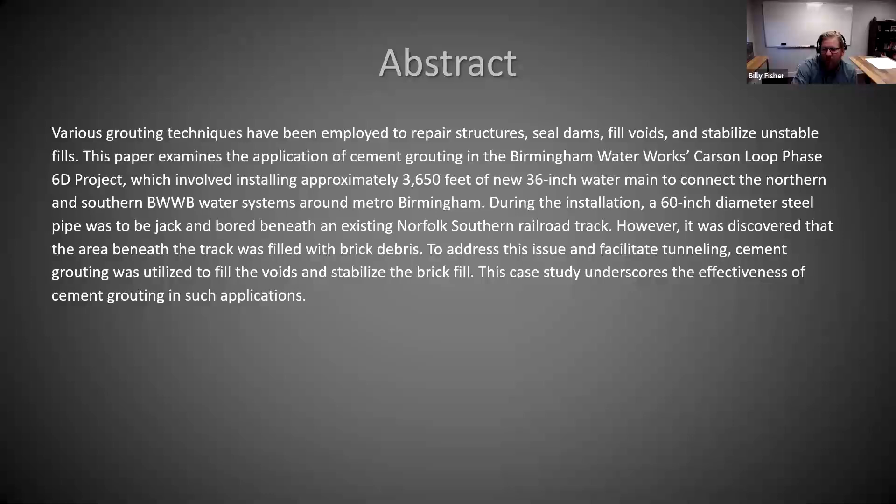This is to be just a case study on a grouting project for a tunnel. The project involved a new 36-inch water main that was going to connect the north and south water systems around Metro Birmingham, and a portion of that was going to be a 60-inch steel encased tunnel that was going to go beneath an existing railroad track. We're just going to go over the history, some of the plans, the geology, kind of what we encountered, and then the grouting program that we had to develop and then go and execute.

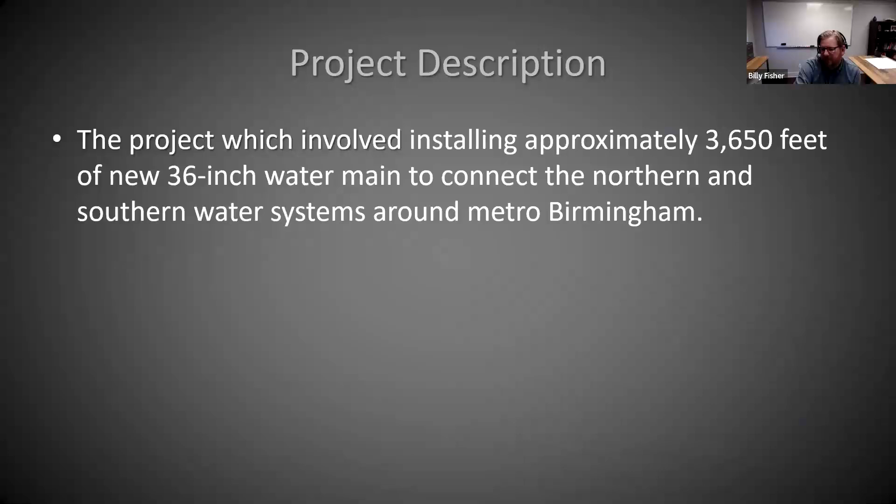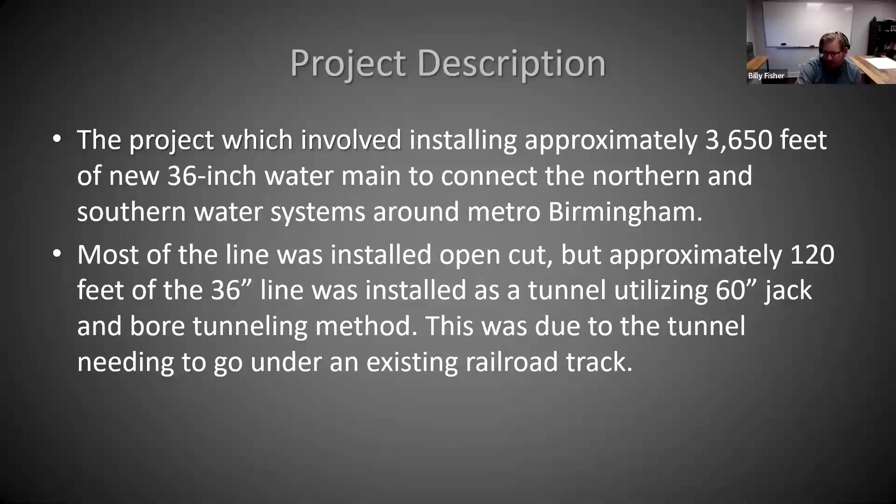The overall project was 3,650 feet of water main. 120 feet of that was going to be 60-inch steel cased, using a jack and bore tunneling method originally.

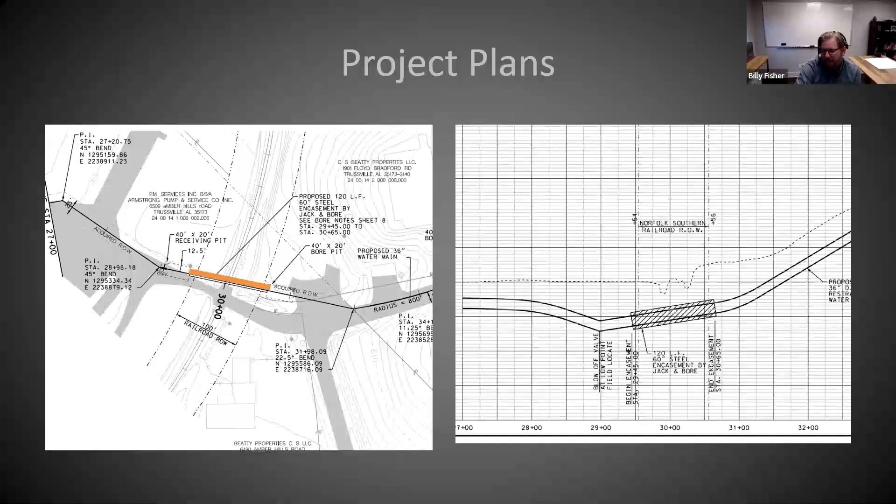This is the 120-foot section that was going to go under the existing rail line. In that zone, approximately 3 borings were done, and you can see the tunneling is relatively shallow, approximately 13 feet below the rail line. That's how much overburden there was over the proposed tunnel.

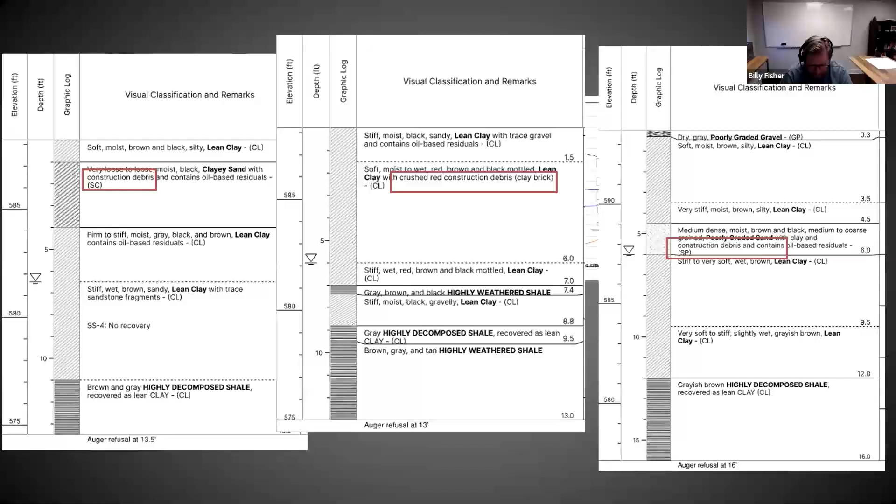You'll notice there was some construction debris in the borings, but mainly it was just in the upper 5 feet, so the tunneling people weren't too concerned about that based on the borings. It wasn't until later that we ran into the excessive amount of brick that was in the tunnel.

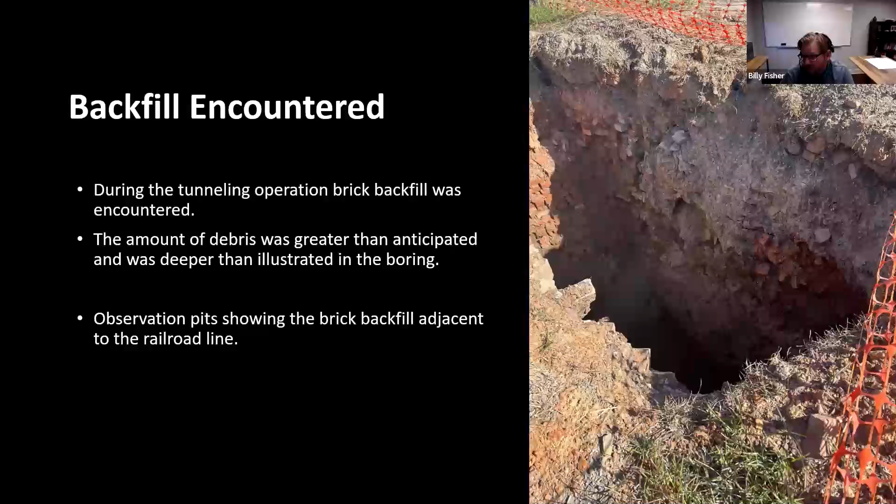The casing was going to be hydraulically pushed, and then the face was internally auger mined. There was a lot more brick than anticipated based on what was provided in the borings. There was a concern that as the face became unstable during the jack and bore, it could cause issues with the existing rail line.

So tunneling was paused, and we did some exploratory pits to find the extent of the debris. Based on the observation pits, you can see the stacked brick. It was a very uncontrolled fill under the railway, but all within the railway right of way, which is where the 120-foot section of tunneling was going to take place.

Only about 60 feet of that was affected by the backfill. So it was determined on site that we'd have to stop the tunneling, come up with some options to figure out a way to get through this.

Two options were evaluated. One was just to lower the tunnel alignment to pass under the fill through the lower rock formation. That would have involved creating a deeper access shaft, so we'd have to put more shoring in, lower that, bring the tunnel down deeper and then bring it back up, along with the cost associated with the additional piping.

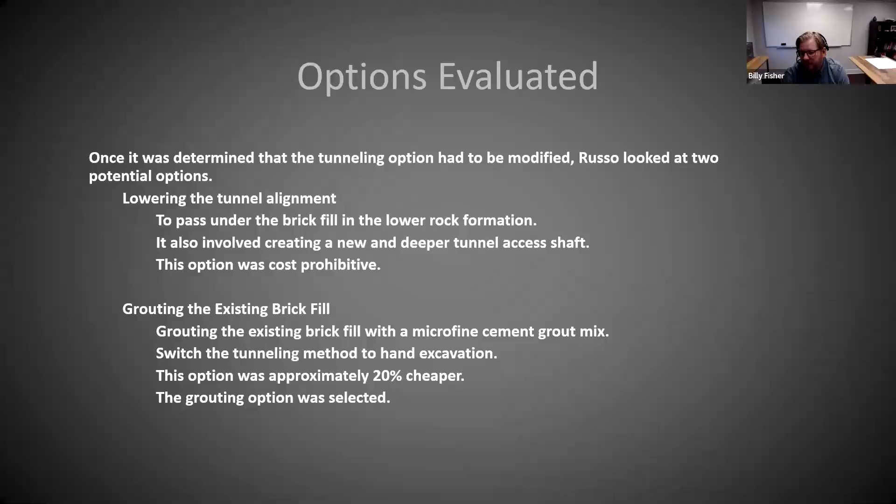The other option was grouting the brick and soil matrix. That would lock all that material together, and then they could continue the tunneling operation.

So to do that, we had to create a grouting program. Once we had selected grouting, we had to determine the best option and what type of grout to use - whether a cementitious grout, a polyurethane grout, a compaction grout, or a low mobility grout.

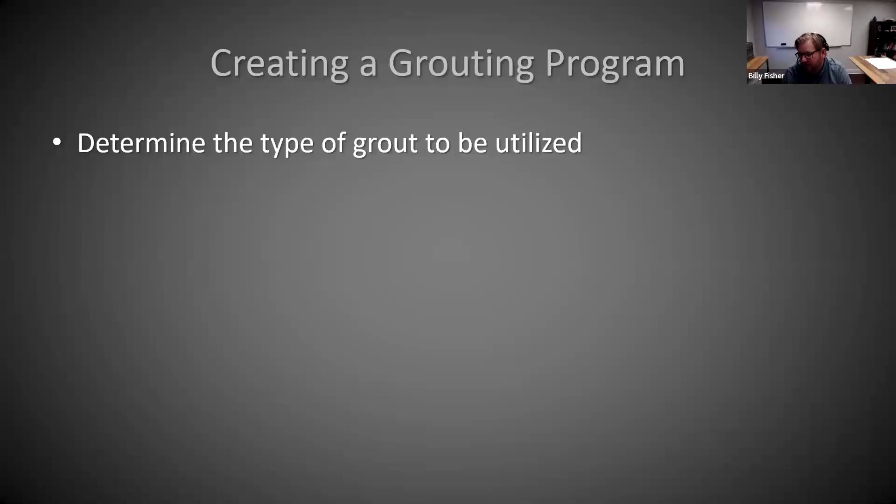Based on the potential for large voids and the need to tunnel back through the grouting material, we opted for a cementitious grout. Then we had to develop a mix design appropriate to lock the matrix of soil, but also weak enough so the tunneling contractor could tunnel back through that material, because we were going to be grouting the entire profile of the tunnel as well as all of the soil above the tunnel.

They were just going to use conventional tunneling methods - they weren't using a boring machine or anything like that. They were just jack and boring originally.

How we were going to introduce the grout into this soil matrix was one of the things we had to determine, and I'll go over what we ultimately decided to do, along with what the grouting criteria would be in the field to ensure the zone had been properly grouted. Ultimately the main goal was to get this zone grouted so we could tunnel back through. We didn't really have the option of this not working, because we had proposed both options and we selected this one.

And we had to be able to make adjustments in the field, like with any grouting program. You can sit around and determine the best option, but it has to be flexible enough that when you get into the field, you're going to have to make changes typically.

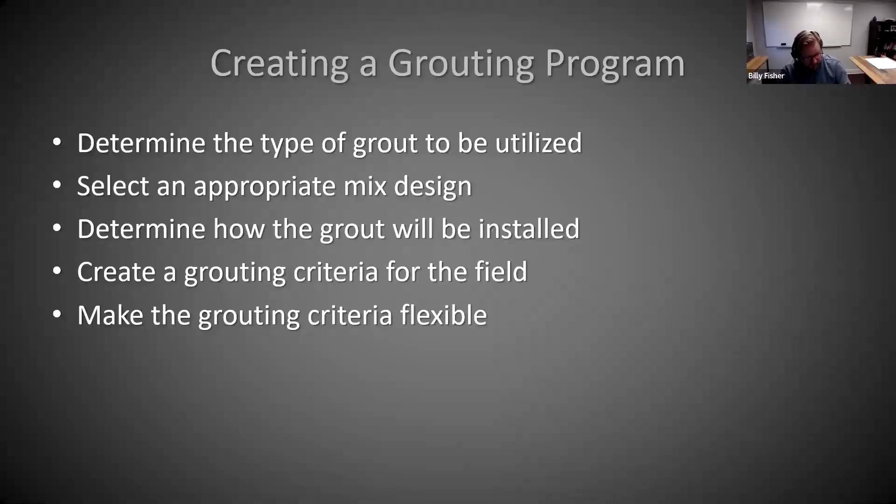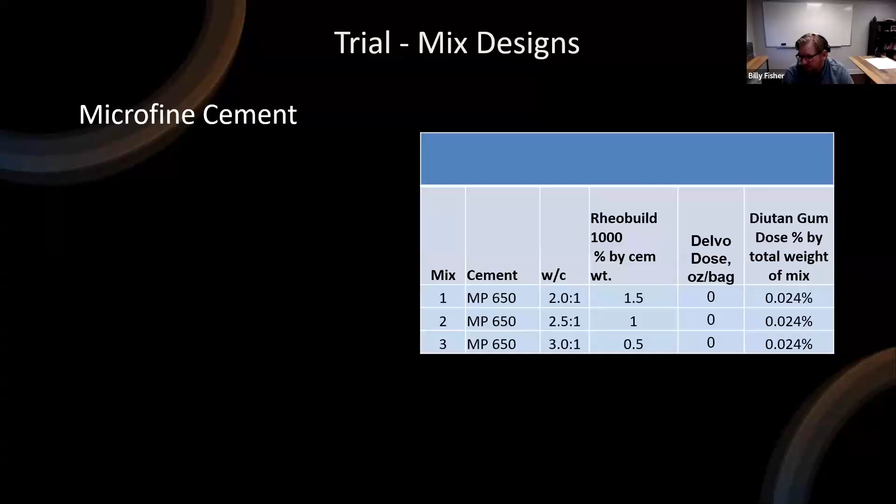We opted for a microfine cement. We ran a few different mixes in the lab just to determine what would be the best option for us. We ran a 2-to-1 water cement ratio, a 2.5-to-1 water cement ratio, and a 3-to-1 water cement ratio. We were looking at ultimately how much the mix was going to bleed, what was the bleed percentage, and what was the strength.

We had opted for, we were targeting like 200 psi for the grout. We figured we just needed to be strong enough to lock all the material together, but also be weak enough where we could tunnel back through this. And then we wanted to limit the bleed to less than 2%.

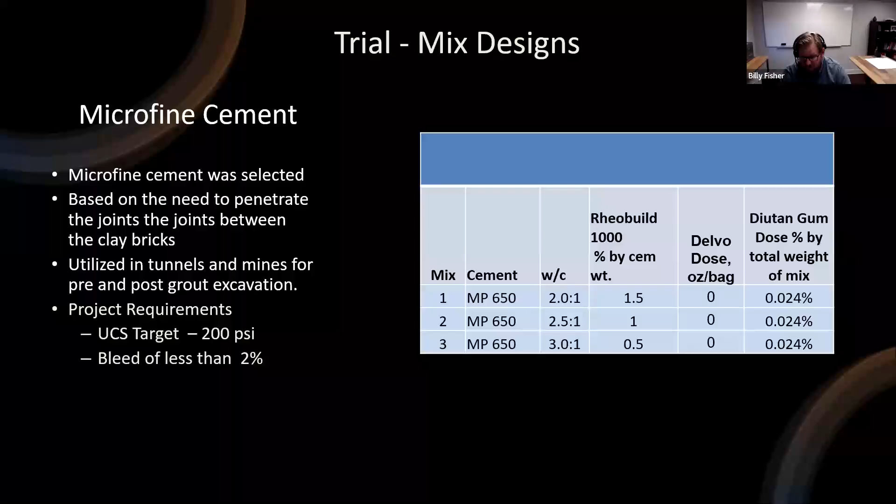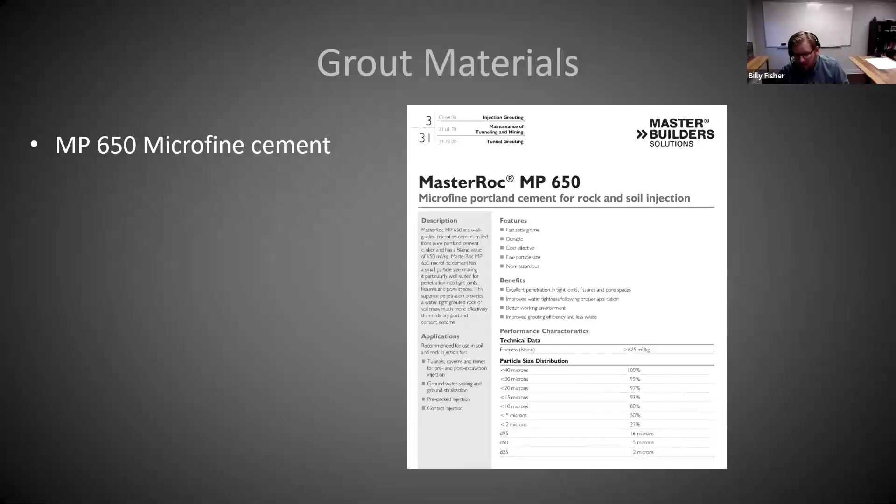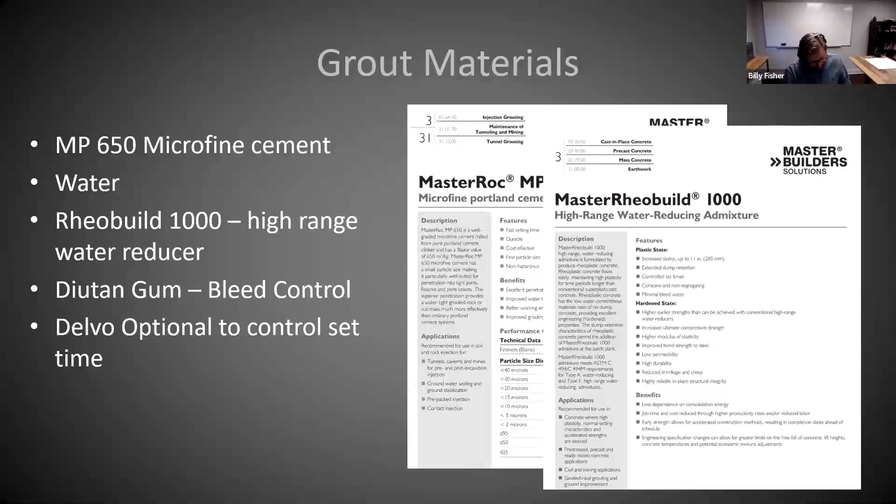So we used a Master Builders, MasterRoc MP 650 microfine cement. Obviously had water in the mix, and then we used a high range water reducer, as well as Diutan gum. And then we also had Delvo just to control the set.

So the Diutan gum was what we used to control the bleed. In many of your applications that are under pressure, you don't want separation. We're trying to keep the water from separating from the mix because we're pumping into a mass. This is especially important here because we weren't sure what type of voids we would encounter, if they were larger voids. So we needed the bleed to be stable for the grout, so it would uniformly suspend until the grout was able to set, and everything would be uniformly distributed into the void space.

Grout stability can be described in two ways through bleed, and then Diutan gum was a sugar byproduct, which means we had to be careful we didn't overdose it as well because it can adjust the set time. The Diutan gum was a powder, so we had to mix it with water to make it into a gel prior to adding it to the mix.

Some of the results from the mix design: mix one in the lab, we had confines of about 260 psi and roughly zero bleed. Mix two had similar breaks, but we had a greater amount of bleed. And mix three, we determined it was not really going to be an option because the bleed was greater than 3%, and also they had difficulty removing the samples from the molds. It just was not setting - too high of a water cement ratio.

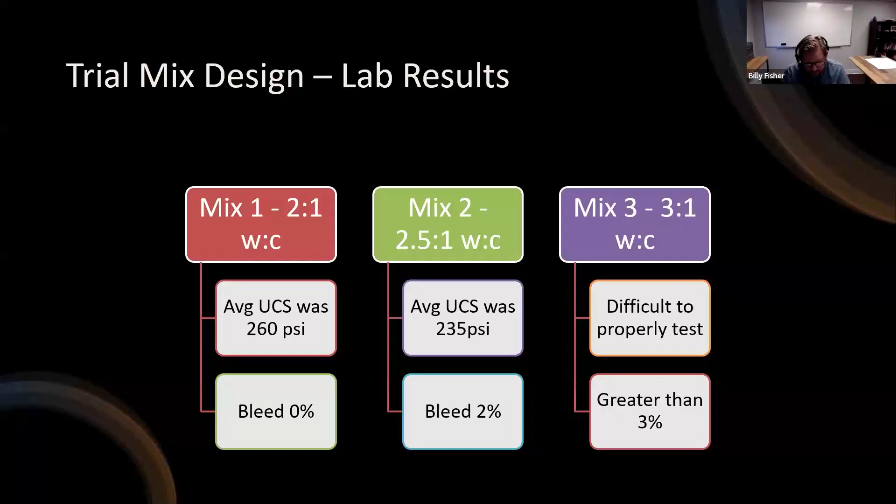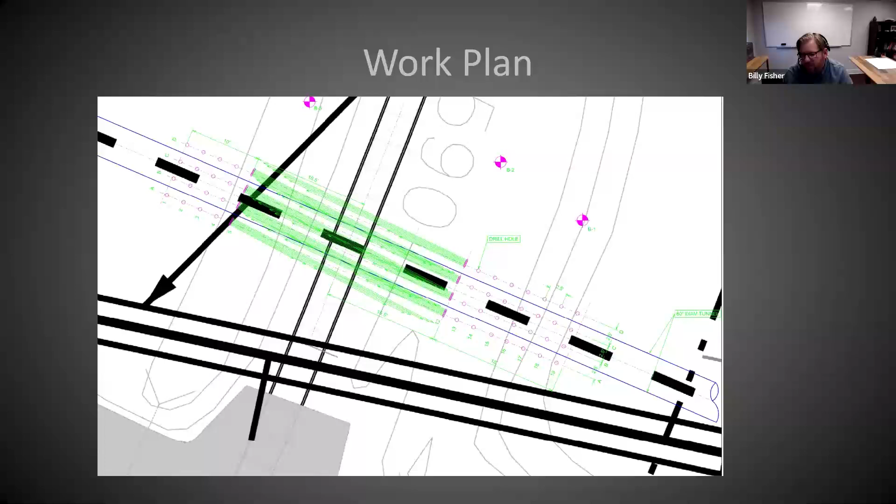So we had to develop a work plan. We decided we would go with 4 rows of grout holes on like a 2.5 by 2.5 grid. And because of the track, we were limited to how close we could get to the track based on the right of way, since this was an active rail line. So as you can see, we had vertical holes and battered holes to get to the zone below the track, based on the project constraints that the railroad placed on us.

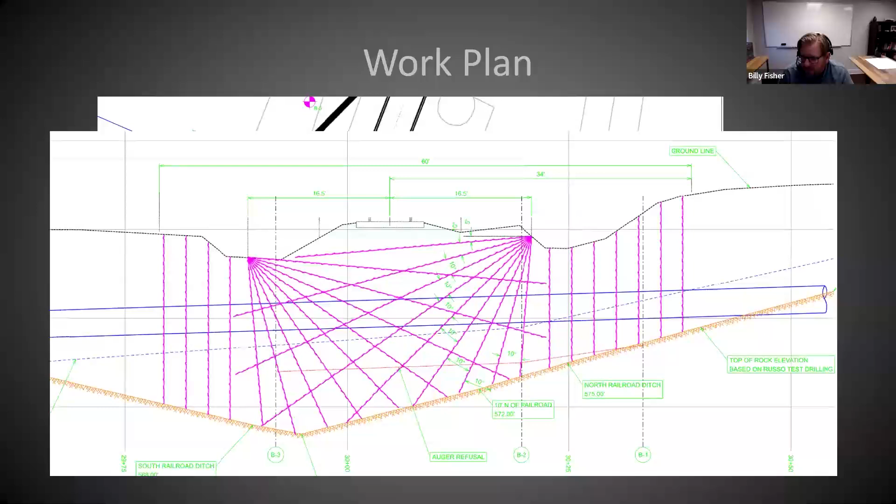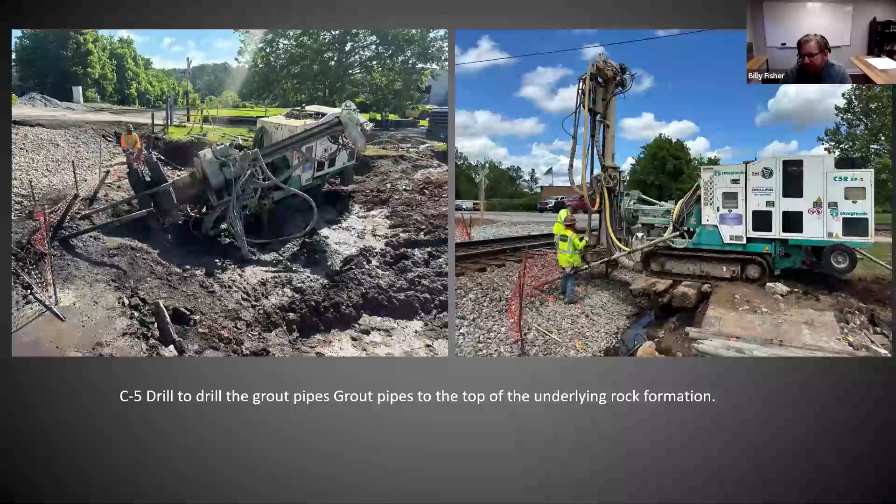This is just kind of - we used a medium-sized drill, a C5, to drill in the grout pipes. We drilled the holes down to the top of rock, so we were pretty much grouting from the rock formation all the way as close to the surface as we could.

Here's the pipe, and you can see the different batters on the pipe in the field. So it was obviously made, grouting a little bit complicated, but that was just due to the railroad requirements.

So we used a Chem Grout machine to batch. Typical batch was, we used the microfine cement, they were 33-pound bags.

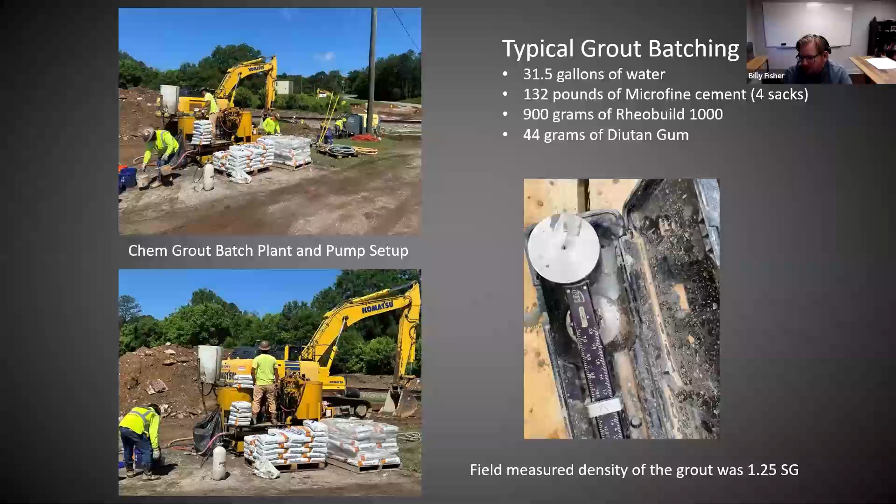We were batching 4 bags at a time, 31.5 gallons to 132 pounds of microfine cement. Then we were adding 900 grams of Rheobuild 1000 and 44 grams of Diutan gum to control the bleed. That was pre-blended with water to create a gel material. In the field, we were getting a specific gravity of 1.25, which was very similar to the lab results we were getting on the mixture.

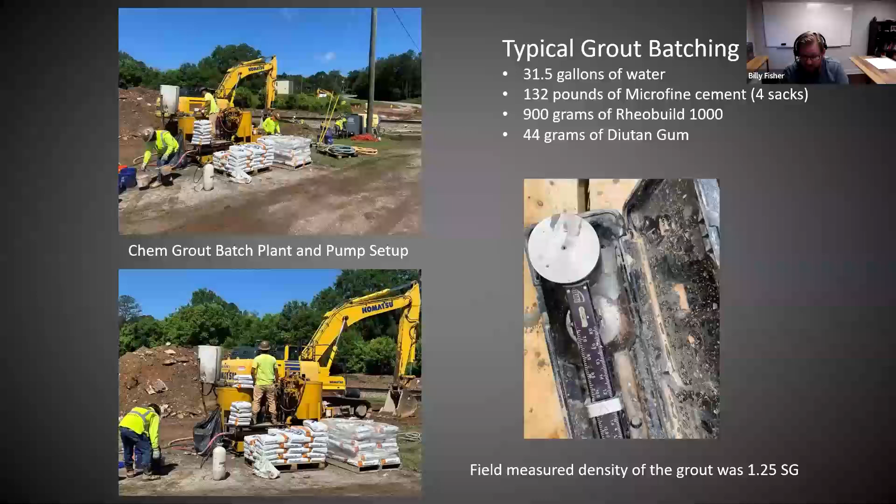So we set up a primary and secondary sequence across the holes. We started with the outer two, line A and D, and we grouted those in a primary and secondary fashion just to create some confinement. Then we would come in and do the interior rows B and C, on every other pattern as well.

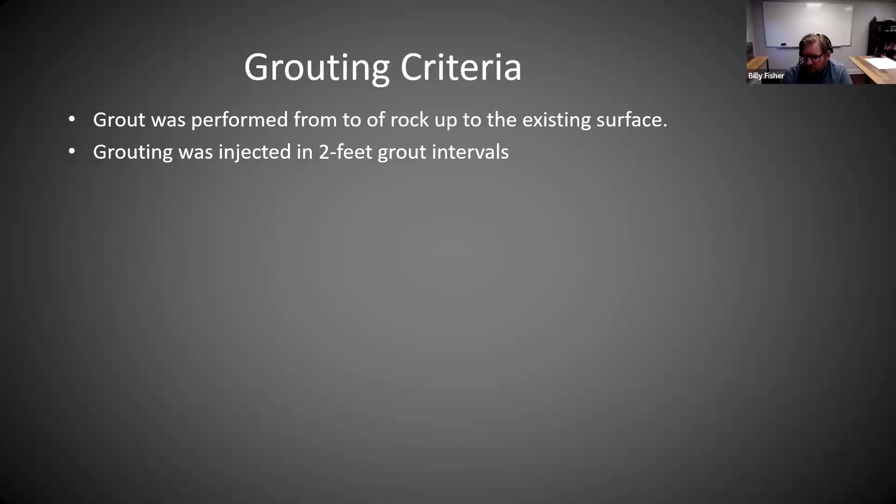So the grouting criteria, how did we determine that we had grouted everything properly? We were going to grout from the rock to the surface. We did grouting in 2-foot intervals. We would grout, and once we hit our cutoff criteria, we would come up 2 feet, and so on. We determined that we would do it based on, we were shooting for 100 psi.

It's a flow of about 0.5 cubic feet per minute for 10 minutes. Or if we had refusal, a grout refusal, or communication with another location was another one of the criteria to stop grouting. Or if we hit an ultimate pressure of 200 psi.

But if we didn't meet the criteria, we really had no volume limit, because we were trying to make sure we filled all the holes as long as we didn't have refusal. And then once we got the refusal, we would go to the next stage, and so on.

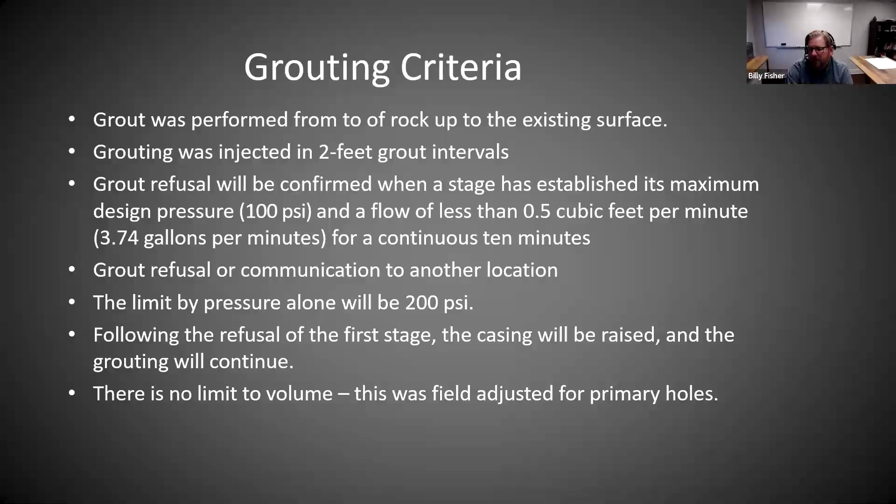Once we were going, we decided on the initial primaries, we made a change in the field. We set a volume cutoff just on the outside primaries of 75 gallons per zone, so that we could try to limit how far the grout was traveling outside of the zone we were trying to grout. So we did set volume criteria on just the outer rows, and then we didn't on the inner rows ultimately. That's when I was talking about we have to be able to have a flexible grouting program.

We did field testing on just the grout to make sure, because obviously we were concerned with strength. We want to make sure in the field we weren't creating a stronger grout or a weaker grout, because down the road it would potentially be an issue for the guys doing the tunneling.

So our 14-day average was 255 psi, and then our 28-day was actually slightly less. Not really sure what led to that ultimately, other than they were very low strength samples, and I don't know if that had more to do with the curing of the grout or maybe the handling of the grout. But I know that some of the samples were damaged because it was difficult to get the sample out of the mold. We actually had to go to the testing lab just to help them with that.

We talked to Master Builders just to see what they recommended. So we had come up with a plan on how to get the samples out without damaging as few of those as possible.

Ultimately, this process was just to facilitate the tunnel installation. There wasn't a contract-specified design strength. So ultimately, the fact that it was less at 28 days, it was really just there to get the tunnel in, and that was the ultimate goal.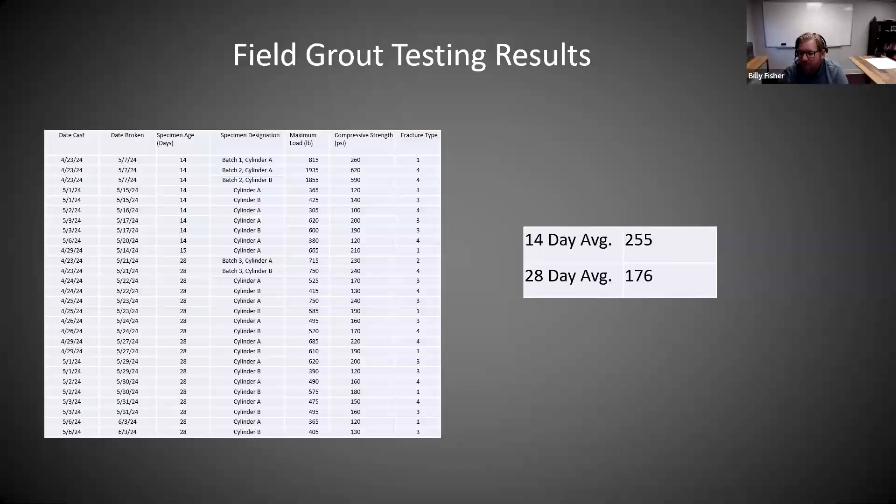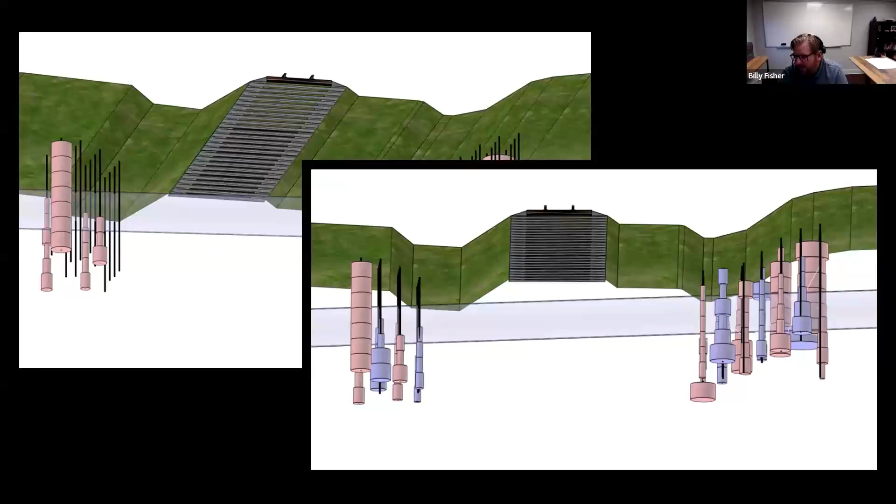This is just some modeling that we did, kind of as the project was going, just to see where the grout was going. Obviously this isn't an exact representation of what we did in the field because we really don't know, but these are just representing volumes at depth to get an idea of how everything was going, and where we needed to install tertiary holes, which we did install a few where we had very low grout takes.

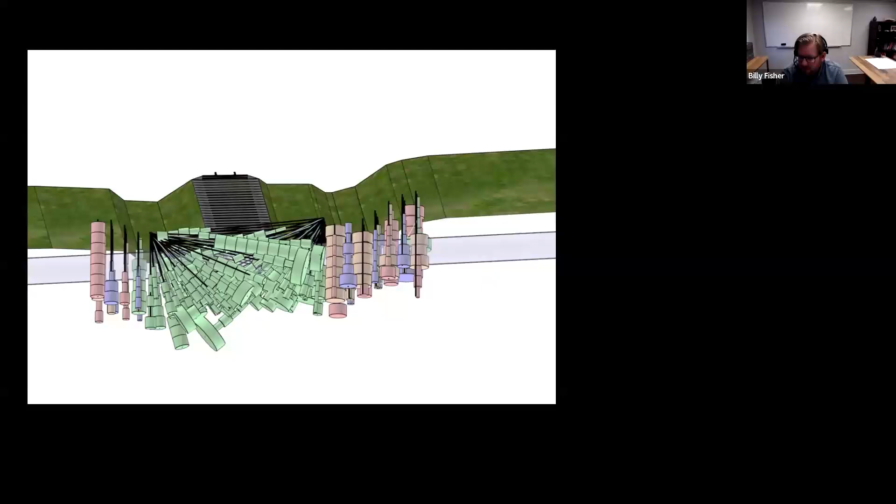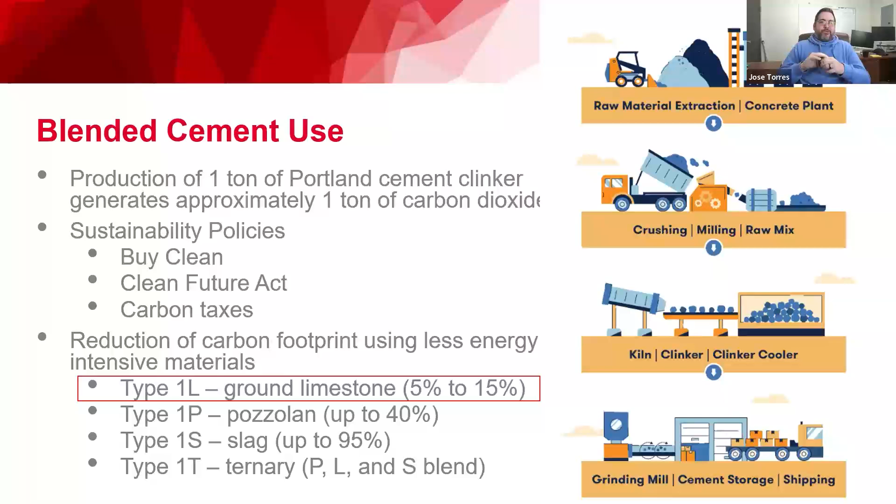So I already talked about this—ASTM C595, Type 1L is 5 to 15% ground limestone. They recommend that you use it basically in a 1-to-1 replacement. So if you're using Type 1, Type 2, Type 3, or even Type 5, they make it real simple: just put the same amount of Type 1, 2, 3, 5 that you were using in your mixes and replace it with 1L, and then see what happens, using a like-for-like manner.

One thing I've noticed, and the reason we're having this discussion, is we get a lot of bids or proposals out, and everybody's copying these specs, saying use Type 1, use Type 2, use Type 3, use Type 5. But these things are getting harder and harder to find as companies move away from making them. Nobody wants to be the first person to use Type 1L, but somebody has to be. I'm not saying we are the first people, but certainly there needs to be more discussion and testing around 1L.

And yet I also have to say this: stop copying specifications, please. All right, I had to do it. I know Conrad's next to me; he's going to hit me, but I have to say it—stop copying specifications.

So we're going to look at 4 different jobs. The first one was Boone Dam.

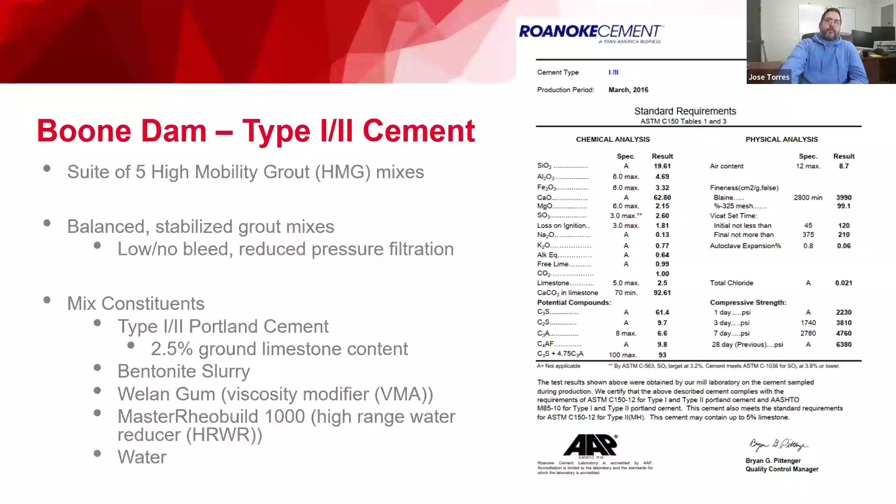The other job we're looking at is Chimney Hollow. There were about 4 balanced stabilized grout mixes using type 3 Portland cement. I had a limestone content of 3.7%. The mix was very similar here. The only difference is we switched out welan gum for diutan gum, just for availability purposes, and diutan gum is a little bit more robust.

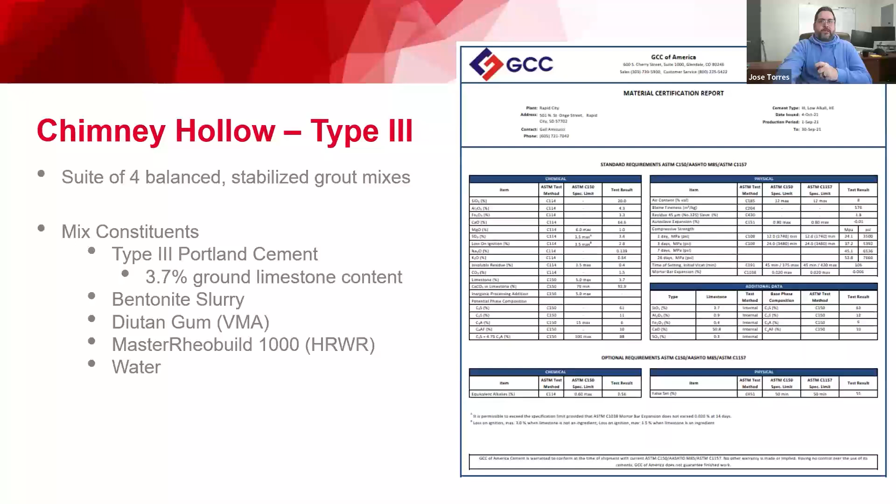At Soo Locks, we did this job the first time we used type 1L at 15%. So when you see type 1L, that number in parentheses tells you how much limestone content is in your mix. That job had 3 balanced stabilized grout mixes, using 1L Portland cement with a 15% ground limestone mix. Generally, the mix components were the same as the other two.

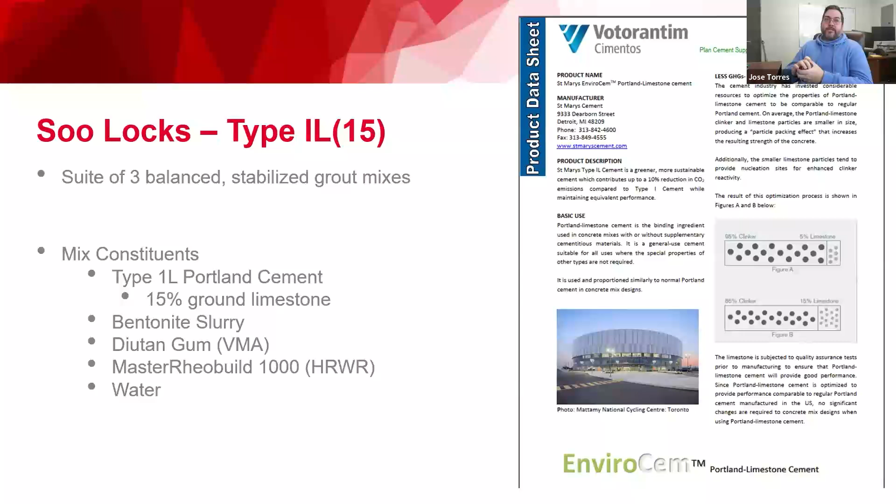And then for Red Bluff, where we are currently, we're using type 1L cement with a 10% ground limestone content, and we're using about 3 mixes here. The funny thing is the specification actually required the use of type 5 cement, and we asked for a variance.

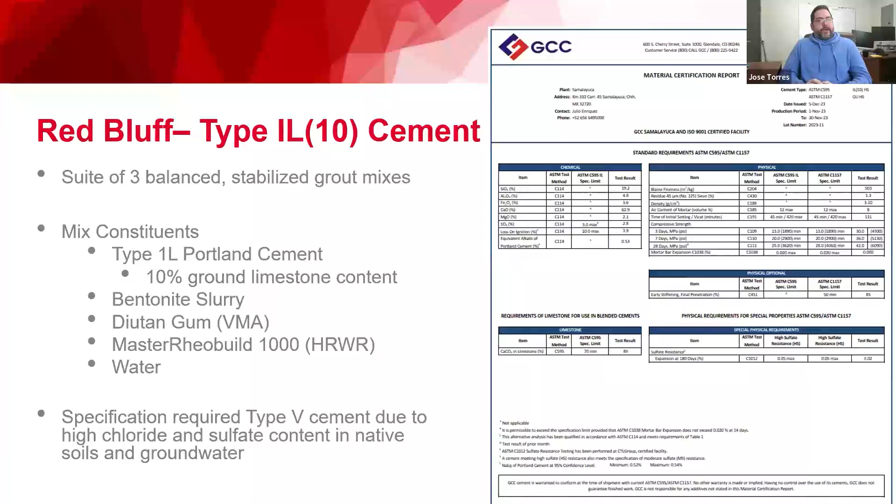It asked for type 5 because of high chloride and sulfate content in the soils and groundwater, so the mix had to have some sort of high sulfate resistance. We found and sourced this type 1L10 cement that we're using, and it passed testing for high sulfate resistance. So we asked for a variance, and we're using 1L here on the job.

These are just key features comparing all 4 of the mill certs we have for the cements used. You can tell the difference in the limestone content: 2.5, 3.7, 15, and 10. Some comparisons for blaine fineness as well.

There's a lot of interest in blaine fineness and what that means in terms of grout travel and maybe a little bit of segregation, I don't know if you want to call it that, but how it interacts with pressure filtration is something we're going to be looking at in the future. I've heard about it from multiple people in the industry now, so there's big interest there.

Here's some initial set times as well for every cement that's out there, based on the manufacturer recommendations anyway. And then there's some strength information for 3-day, 7-day, 28-day on what you can expect out of the cement to start with.

Generally, we can see that type 3 had the highest strength here on this table, followed by type 1-2, and then we have type 1L10 and type 1L15. I didn't put it in order, but that's sort of the order that the paperwork says it's going to be, right?

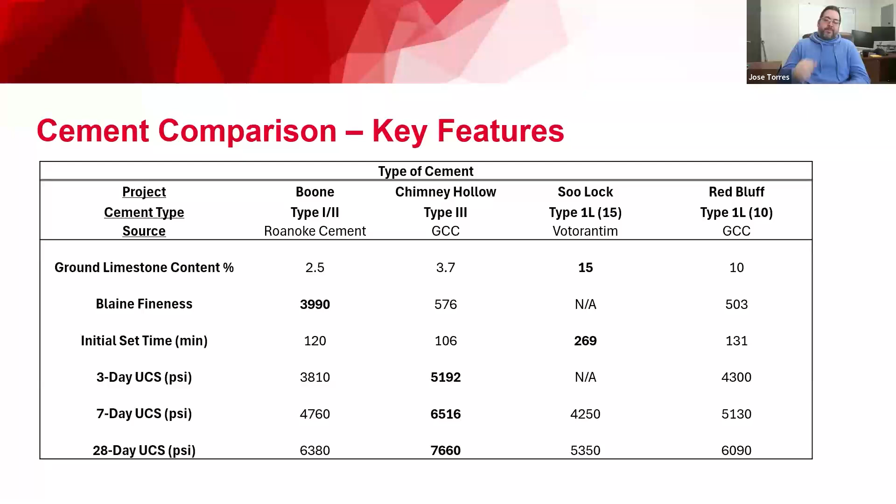So I did my best to compare mixes based on viscosity range. I will say that all these mixes in general are 1-to-1 mixes in terms of water cement ratio, with a specific gravity of about 1.5.

So here we're comparing set times. In the 35 to 45 second range, the 1L15 took the longest to set, colored in orange. I don't know if I have the laser... colored in orange here. And the type 3 took the shortest amount of time to set in that 35 to 45 second range.

When we get to the 45 to 55 second range, our 1L10 seemed to take the longest, and again type 3 had the shortest time. Then for greater than 55 seconds, we're back to the 1L15 having the highest set time, and again the winner, type 3, setting faster.

It's not really a surprise, type 3 is supposed to set faster. It's high early strength with low set times generally. But we did see the longest set time for us was 16 hours.

That's a big question in the grouting world, because unless you're doing 24/7 grouting, your work is kind of dictated by when the grout has set in the hole you're working on, or the foundation you're treating. Like when that's set, you're allowed to keep drilling or moving to adjacent holes. So 16 hours is quite a bit of time.

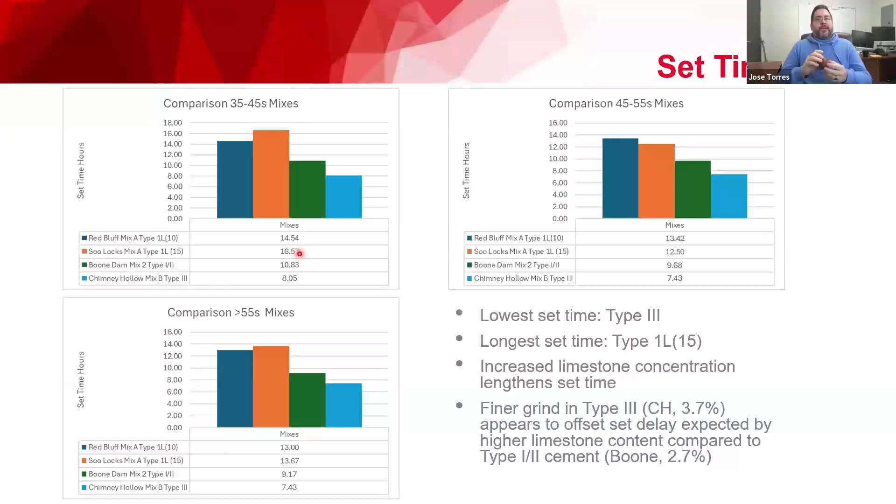So we did explore what using a non-chloride accelerator would look like. We got that accelerator from Specrete, actually.

We saw that we were able, for our mix A at Red Bluff, which had an initial set time of 14.5 hours, to get some set time gains by adding varying amounts of accelerator. At 0.5%, we gained 2.2 hours. At 1%, we gained 3.6 hours. And at 1.5%, we gained 4.8 hours. So quite a bit of gain with the use of the accelerator, but we do start seeing some diminishing returns as we add more accelerator.

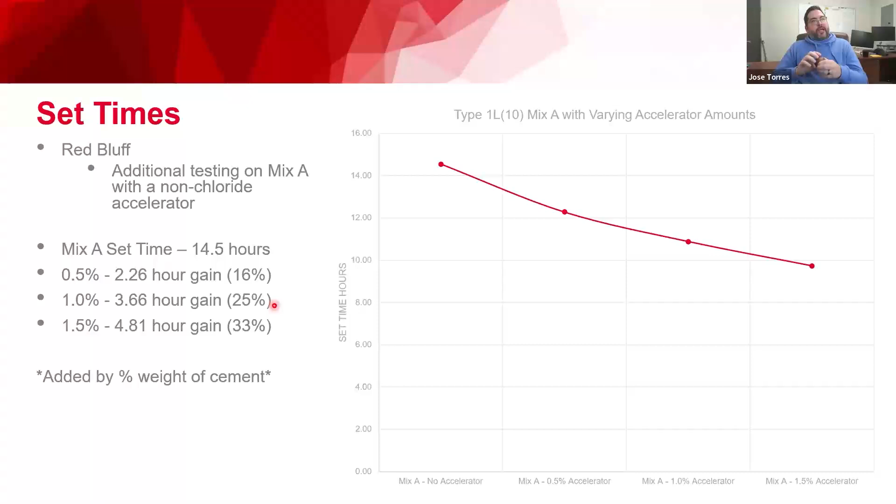In the end, I'll tell you, we did not use it full time at Red Bluff, only because we get 120-degree weather all the time, and we're using chillers and all sorts of things to keep our mix cool. Using accelerators in those kinds of conditions could get dicey if things break down. So we didn't opt to use it, but this is good news for those of us looking to get that set time down.

In terms of compressive strength, not really a surprise here, but in the 35 to 45 second range, type 3 had the highest unconfined compressive strength when we broke them. The lowest was the type 1-2 here, which is a little bit weird, but generally the 1L cements acted similar in the 35 to 45 second range.

At 45 to 55, again, type 3 is the winner there. Not the winner, but just the highest strength, if you care. Looks like 1L and 1-2 performed pretty similarly.

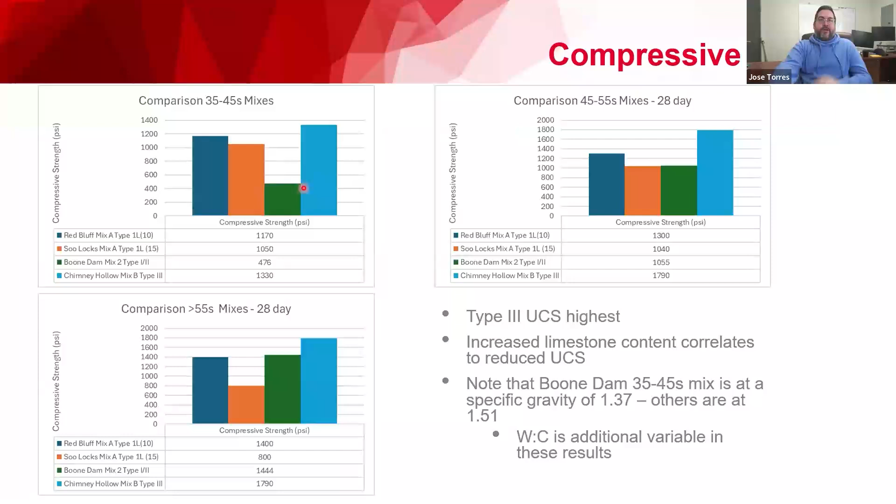And we're trying to compare apples to apples as best as we can. But generally keep in mind that how much cement you have in there will change your strength and your set times. And in terms of pressure filtration...

We saw that basically at the 35 to 45 second range, the type 1L10 had the lowest filtration. Pressure filtration coefficient for that was the lowest. 1L15 was higher than the type 3, and then the worst performer there was the 1-2. At 45 to 55 second range, it's funny, we got very similar results across all 4 mixes. But it looks like that pressure filtration was less at the 1-2 and the 3 mixes.

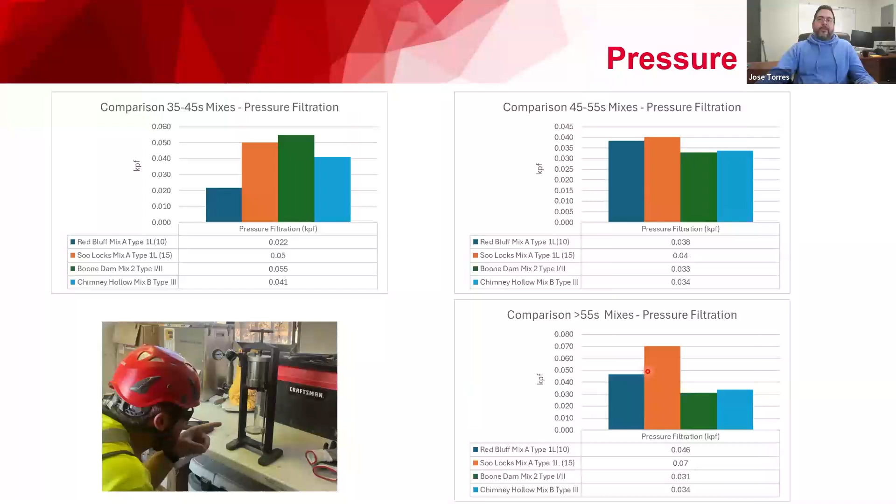And then once we get to 55 seconds or more, the 1, 2, and 3 behave very similarly. And then we got a little bit more water squeezed out of the 1L10 and the 1L15. That was interesting. We're going to look at that some more. You'd expect these values to go down, but they came up from the 45 to 55 second range. That only happened really with the 1L mixes. So there's something to look further into as we look at pressure filtration with the 1L mixes. They're behaving a little bit oddly once we start to get into higher viscosity ranges.

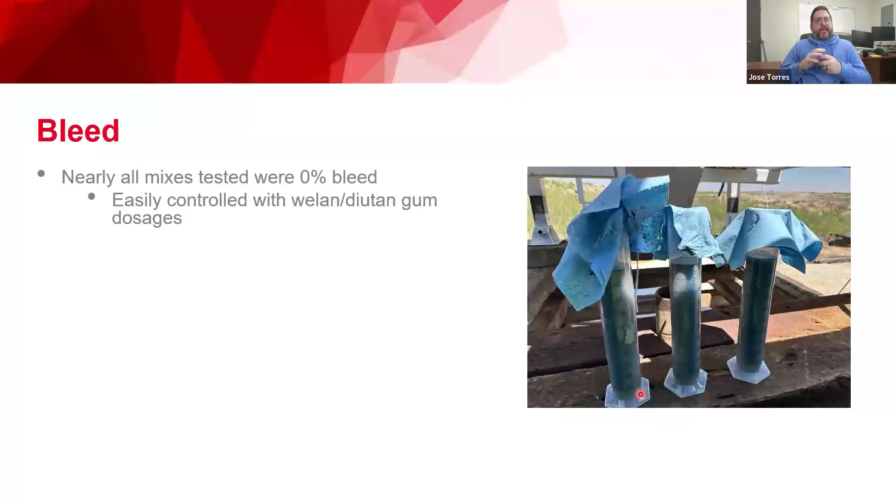And then in terms of bleed, I was going to graph out the bleed, but honestly, we got bleed to 0% on all the mixes. You can really control bleed easily with welan or diutan gum dosages. So I didn't want to just show you guys some blank graphs. But this is pretty easy. There wasn't much of note in terms of bleed.

In terms of the key differences we observed, the more limestone content that you have in your mix, generally we see higher set times. Of course, you can control that with accelerators. I think there's some good data there. We also saw that type 3 had the highest compressive strength breaks. If you go back to the table where we compared the mill certs, that was kind of expected from what the manufacturer's recommendations were saying. Type 1-2 was very similar to type 1L in terms of compressive strength. And type 1L at the 15% content saw the lowest compressive strength.

I'll be with you in a second.

Lower pressure filtration values we saw at type 1, 2, 3 in general. And then type 1L 15, we did see a decrease in pressure filtration performance as the mixes became less fluid. And then a happy accident - well, happy that we were able to get high sulfate resistance at a type 1L10, which was able to take the place of type 5 at Red Bluff. So there's uses for these type 1L mixes as we move into everybody basically making it.

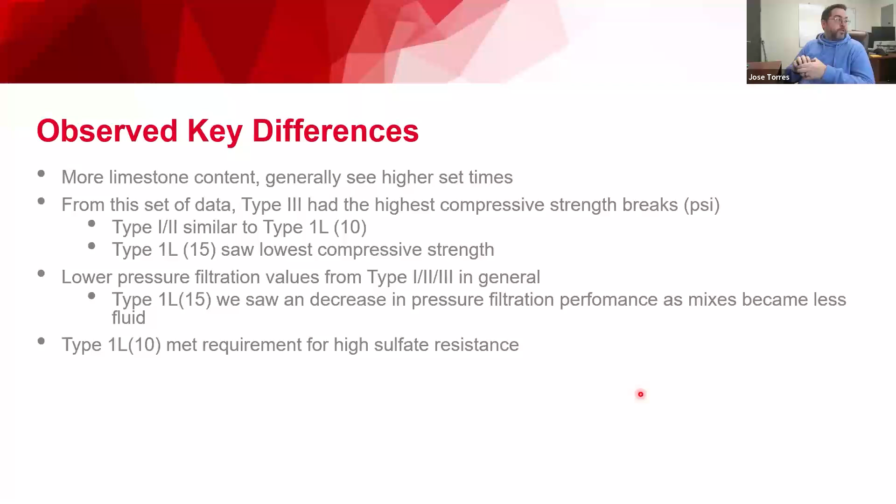And getting away from type 1, 2, 3, and 5. That was really all I have for you. So I am going to turn it over to Eric Manning over at Southern Company.

Thanks. Let's see. Let me back up.

All right, so I'm going to be providing an update on the Logan Martin Deep grouting project. For those unfamiliar with the site, Logan Martin is located roughly in central Alabama, and it's an earthen embankment and gravity composite dam. Here you can see a few of the main components of the dam, and I'll go through these from left to right. You have the west embankment, which geologically varies slightly from the east embankment.

Logan Martin was constructed on a karst geology. The west embankment has less fracturing and solutioning features. Moving to the right, you see the concrete gravity section of the dam, and then the 77 bolster, which overlays the original riverbed section of the Coosa River that was inundated to develop Logan Martin Dam. Then you have the 79 bolster, the surcharge, the east bolster, which was constructed back in 2019, and then the far east section of the embankment, which through the history of the grouting programs at Logan Martin has had little to no remedial grouting.

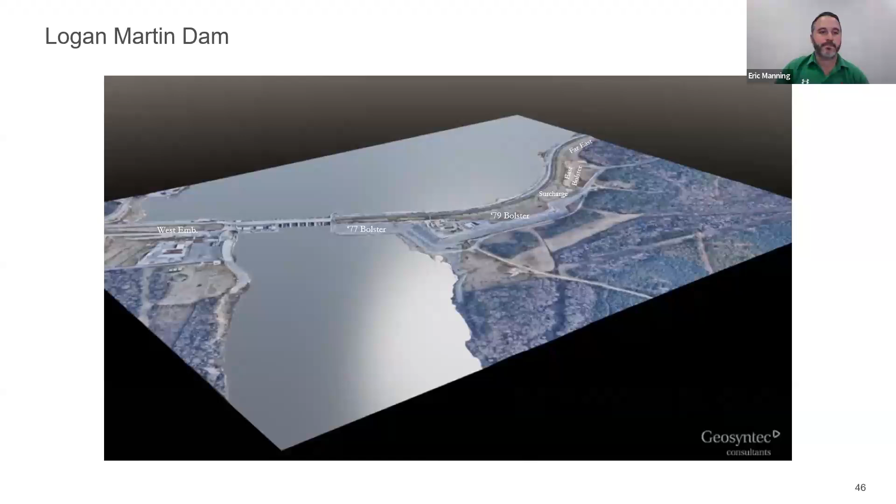So as I mentioned, Logan Martin is constructed on a karst geology, located in central Alabama. This figure shows its geological location in relation to some other notable grouting projects. It's very similar to Boone Dam. Logan Martin is underlain by the Knox group, which is composed of dolomite that contains varying amounts of chert interbeds and the occasional limestone bed.

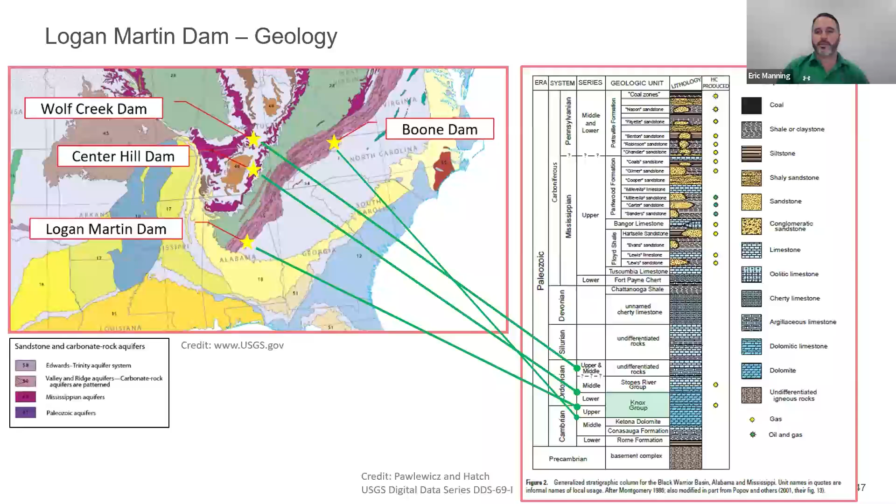As you can see here, the rock at Logan Martin has undergone extensive faulting and folding, which has increased the development of the solutioning and other karstic features. It's resulted in the development of seepage paths that have developed along the stratigraphic zones and joints, at folding axes and faults. The solutioning has penetrated down pretty deep, to depths around elevation 0, while the Logan Martin crest is around elevation 487.5.

So there's been some drilling that's gone as deep as 600 feet or so below the crest elevation, and the solutioning features, the karst geology, doesn't have an end to its depth from what we've experienced out here, which limits the remedial options. So without an end to the karst features, there is no bottom to grout to install a cutoff wall.

So what we've been limited to through the years is what we refer to as a hanging grout curtain, which I'll get into a little bit when I go through the various remedial grouting programs that have been performed out at Logan Martin through the years.

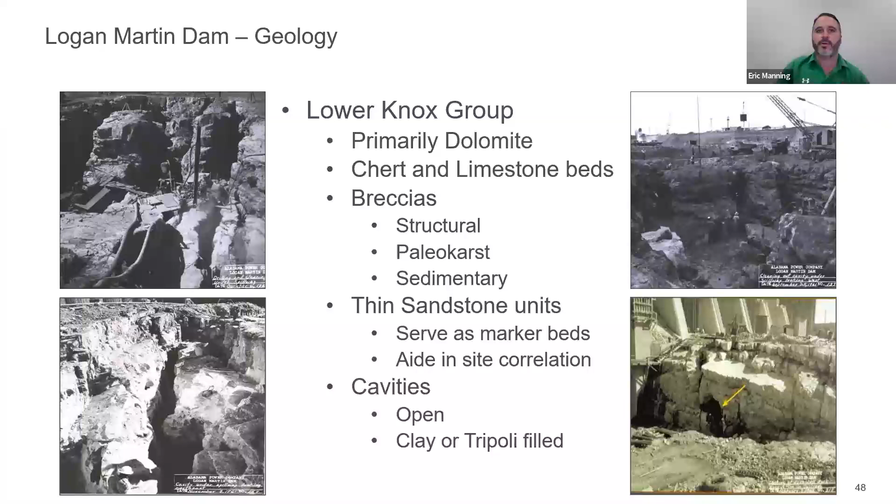Let's see. Here we go. All right.

Just a timeline of major milestones throughout the years at Logan Martin. Subsurface geotechnical investigations began in the mid-50s, and construction began in the 60s with the original grout curtain. There was very little to no grouting after the original grout curtain until the 1968 sinkhole, which triggered the programs in the 70s that I refer to as the era of exploratory grouting - I call it that because there really wasn't a structured grouting program with a clear, definitive goal.

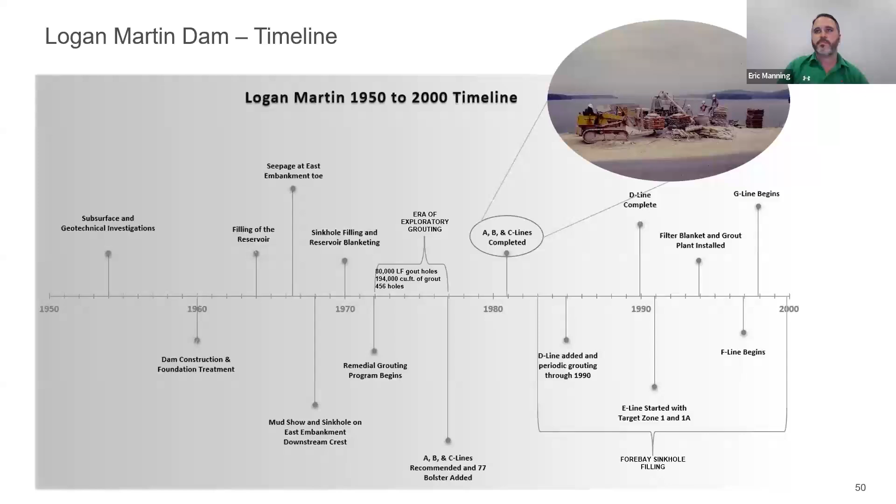So as I mentioned, the original grout curtain I would consider to be pretty deficient for these reasons. The primary holes originally in the test section, prior to construction of the embankment commencing, the criteria or design for the test section was on 20-foot centers, and the volumetric criteria was 0.5 cubic feet per linear foot to achieve closure.

Through what appeared to be reading between the lines in the old reports, Alabama Power faced extraordinary budget and schedule constraints, with construction scheduled to start in early 1961. So they basically reestablished the guidelines for installing the original grout curtain, and based on inconclusive results from the test section, they doubled the spacing of the primary holes, and then doubled the volumetric refusal criteria as well.

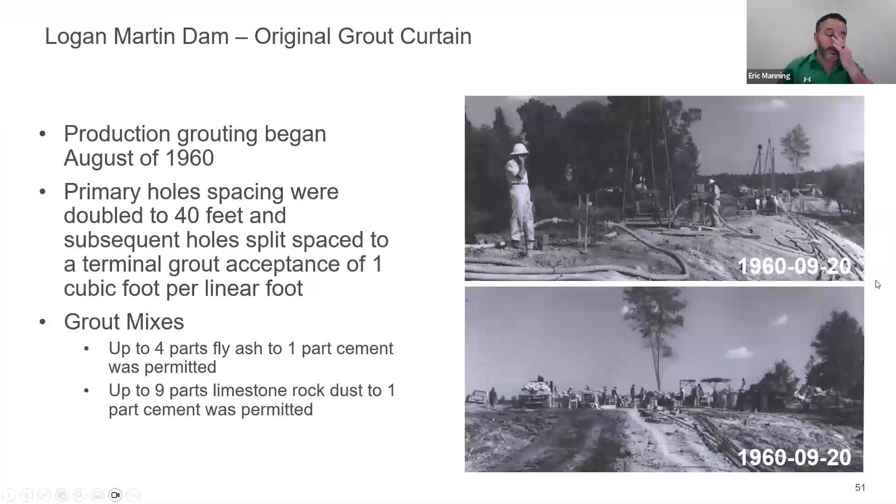As well as that, as I mentioned, the grouts used in the original grout curtain were erodible. They were as much as 9 parts limestone rock dust to 1 part cement, and there was a lot of fly ash as well.

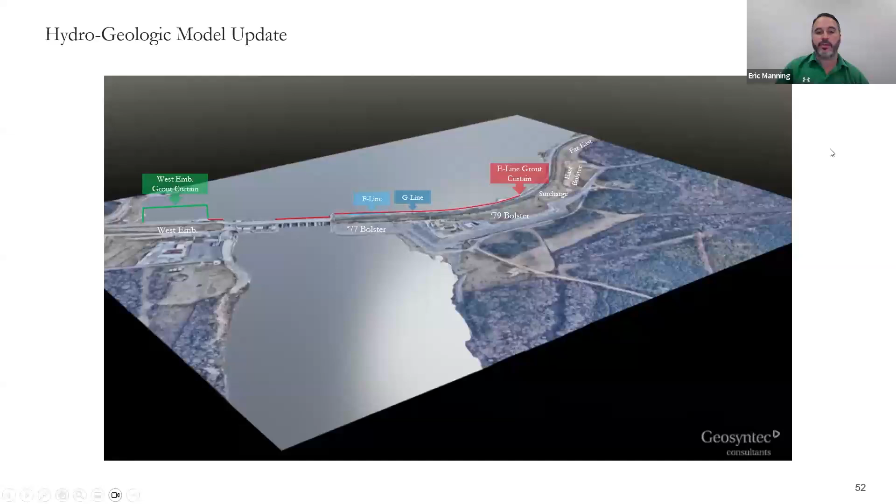So following the 1968 sinkhole, in the 70s you see A line through D line were installed. And then following D line, E line, F line, and G line took the grout curtain down to elevation 0. So that was just a sequence of all the multi-row grout curtains that have been installed through the years.

This is just an overview of the same information from the previous slide. You can see a lot more extensive grouting in this area. Let's see if I can get my laser back. There we go. In this area, we have up to about 5 rows of grout curtain just in this section, and this is upstream of the 1968 sinkhole.

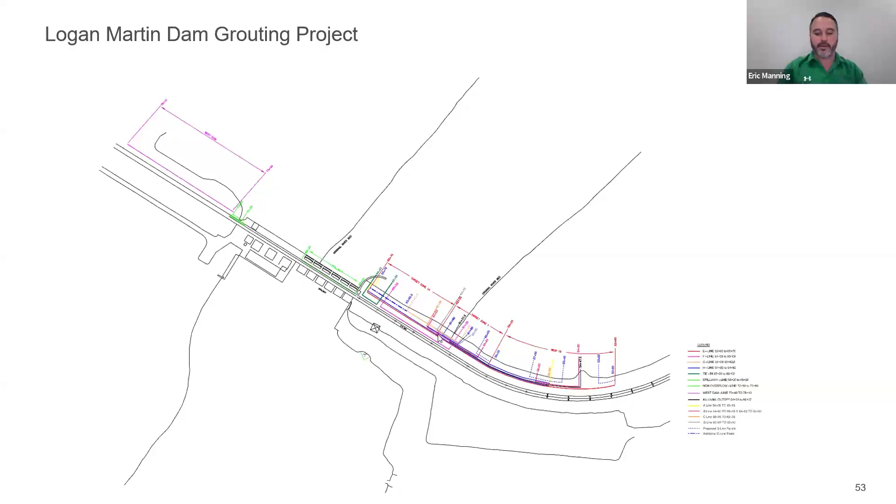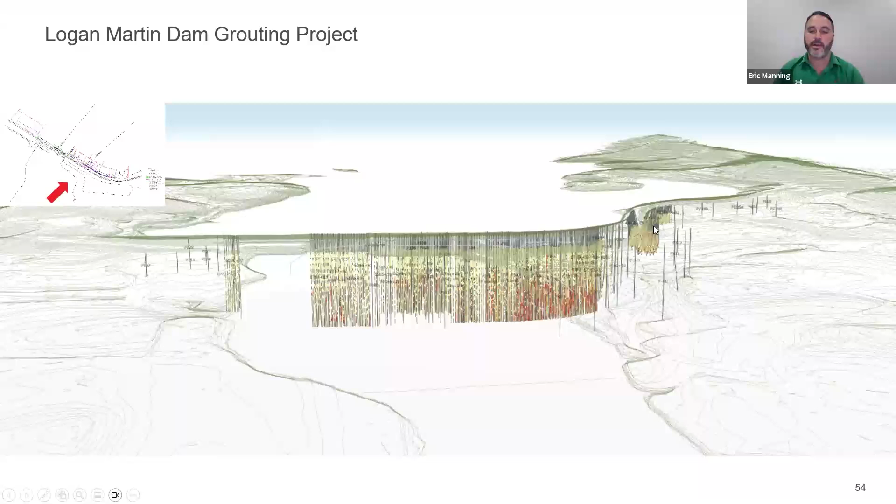This is a relatively recent addition to the remedial grouting efforts we've been performing out at Logan Martin, where we're reinforcing the shallow epikarst of the rock out at the site.

The goal with this phase of work was taken from a concept provided by William White in his literature, the geomorphology and hydrology of karst terrains. In that literature, he described the potential instability of shallow karst features with a varying water table. As the water fluctuates up and down in these karstic features, it creates a suction that can collapse the epikarst and lead to multiple failure modes.

The hydraulic conductivity across the site, and its connection with the tail race, specifically the east embankment, makes shallow karst features susceptible to washout, losing its strength, and also susceptible to collapse, according to White's literature that we used as a basis of design for this work.

The goal with these columns is to drill 50 feet into the epikarst and inject a volumetric limit of grout that gives us roughly a 6-foot diameter column, 50 feet deep, to help support the overburden directly beneath the embankment fill and help prevent the collapse.

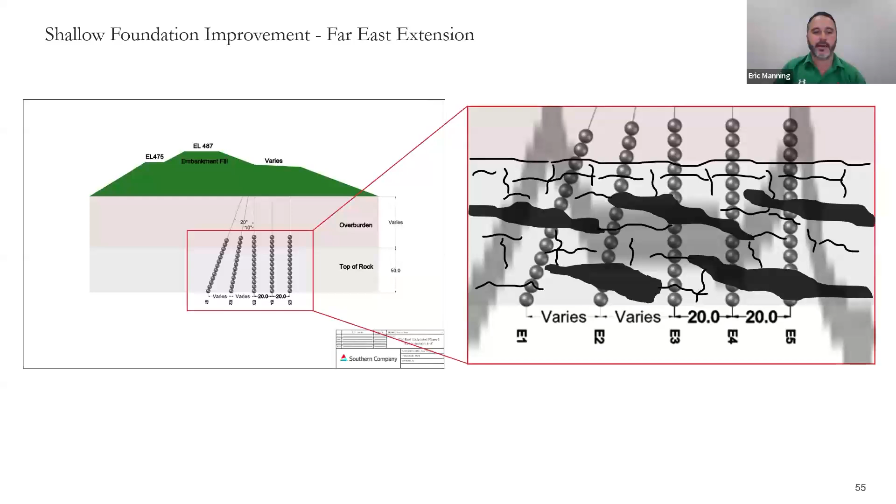And now just a quick run through the geologic model. This shows where we've installed the columns to date.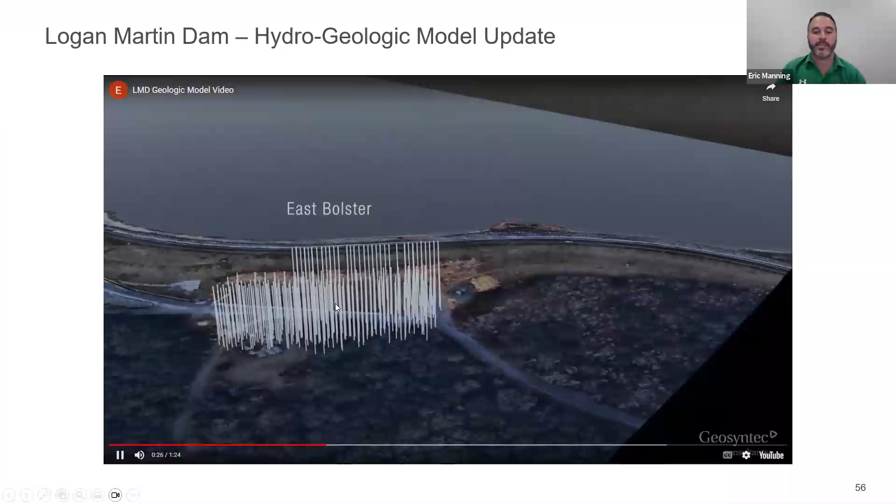So right there where the columns are going up, that's the east bolster, the newly constructed east bolster. We had to recently raise the bolster higher so that we could get sufficient spacing between the upstream and downstream columns. As I mentioned, the spacing we target is 20 feet.

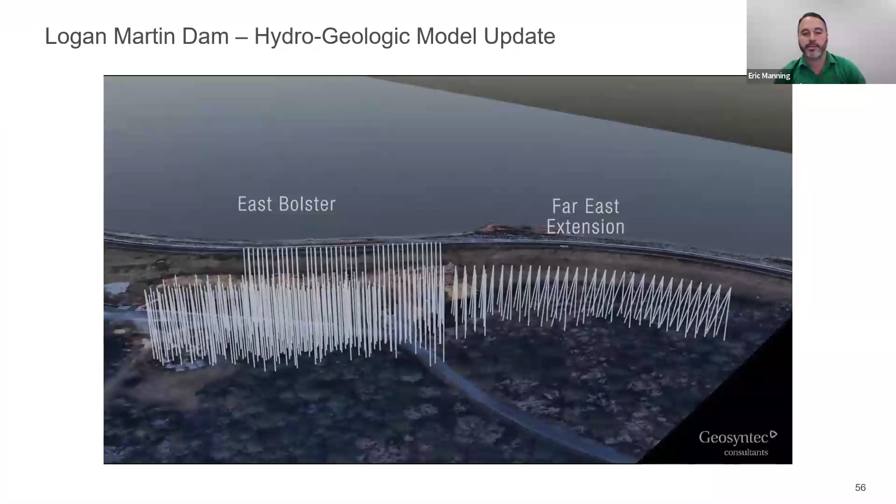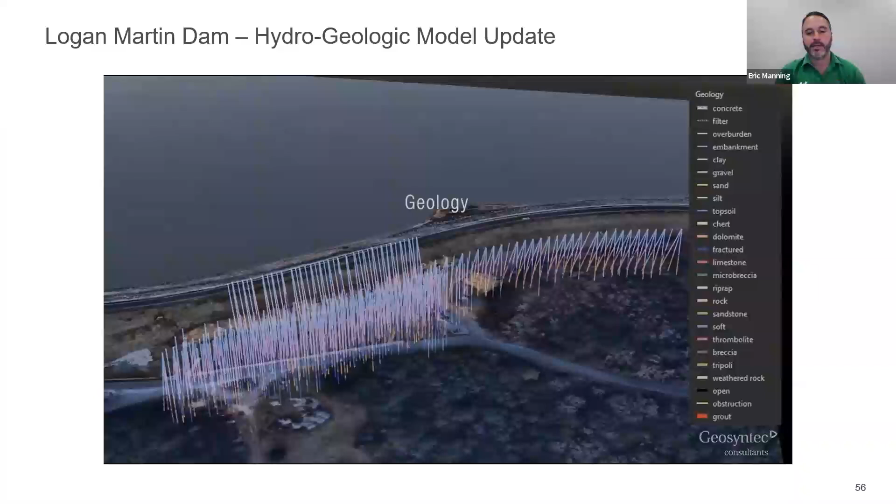What we found as we were drilling the east bolster was that the minimum rock cap needed for stability, based on our calculations, wasn't met. The rock cap we needed for sufficient support was 2 feet, but in most cases it was much less than that. In a lot of cases, the top of rock was highly fractured.

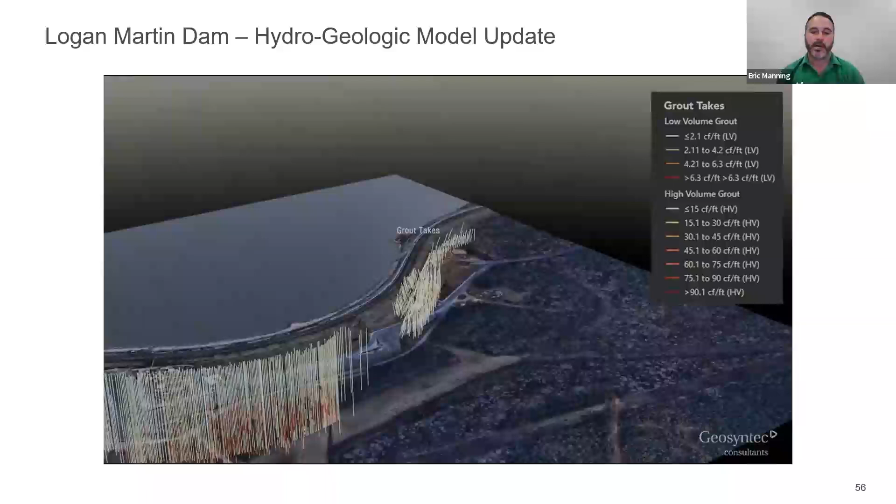So we had to reduce our spacing down with interspaced holes on roughly 12 to 14 foot centers. We noticed the same thing farther east as well, and that's part of the next phase of grouting, where we'll install the interspaced holes in areas with insufficient rock cap.

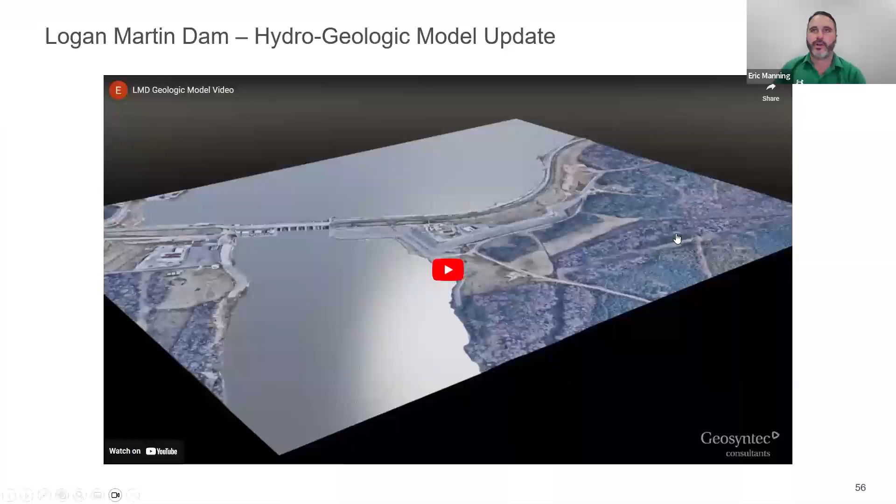Oops, let's back up one. Sorry, it took off on me. See if it stopped. Okay, I think it stopped.

Also, another phase of grouting we're currently performing now, concurrently with the columns, is what I call a composite grout curtain. It's a combination of LMG grout, two rows, one row downstream, a row of LMG upstream.

The goal is to target the large voids and karstic features that would be susceptible to really high grout takes with high mobility grout, which is what we used in our conventional hanging grout curtain installation methods. So this is an effort to reduce grout travel.

This section here is roughly 1,000 to 1,200 feet from a weir that we monitor closely in the tail race, which flows roughly 16 to 17,000 gallons per minute. We get grout travel that will communicate all the way, over 1,000 feet, to that weir.

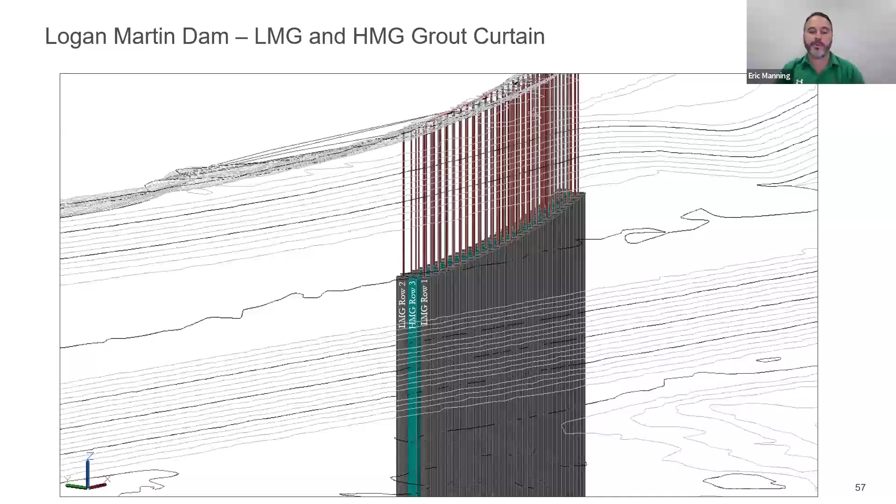And that's considering the total volume from both the low mobility grout and high mobility grout phases of the work. So an overall 30% reduction in cementitious grout compared to a single line, high mobility hanging grout curtain versus this three-phased, multi-row low mobility grout, high mobility grout composite curtain.

One thing that makes Logan Martin extremely unique, I feel, is that we self-perform pretty much all of the work. The only services we don't self-perform are consulting.

As I mentioned, we have Geosyntec on board with us. We have a board of consultants, as well as Triel Engineering, another consulting firm that consists of Bobby Williams and Ron Robinson, who between the two of them have about 80 years of combined experience at Logan Martin Dam alone.

Bobby Williams was the previous geostructural services supervisor. There's not many people that understand and are as experienced in grouting karst as Bobby.

And Ron Robinson, he's the geologist. Not many people understand the karst geology as well as Ron either, especially at a site like Logan Martin.

So in addition to the 30% volume savings we've gotten from this new composite hanging grout curtain concept, we've recently begun a low mobility grout mix development program where we're trying to get away from fly ash, because fly ash is now in high demand with fossil plants closing down one by one.

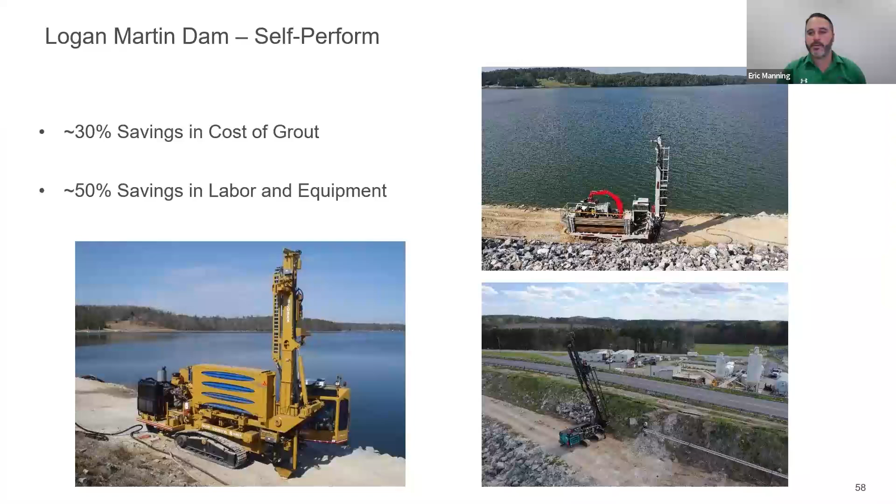So here's a couple other pieces of equipment that we have. As I mentioned, we sonic drill all of our production holes now. Here you've got our brand new TSI rig - this is a TSI 150C crawler out here farther along the east embankment. On the picture to the left you can see the Borterra, also shown in the picture to the right, along with the two volumetric mixers.

These volumetric mixers have saved us an extremely large amount of money. Originally, we got all of our low mobility grout from a local ready mix supplier, which resulted in an extremely high amount of waste. The greatest addition we've had with equipment has been these volumetric mixers, because it's essentially cut our waste down to zero. This allows us to mix low mobility grout on demand.

They also serve as a really good emergency response piece of equipment. If a sinkhole were to develop, or if we're injecting with high mobility grout and we get into flow, these volumetric mixers can be utilized as a good emergency response to mix low mobility grout on demand.

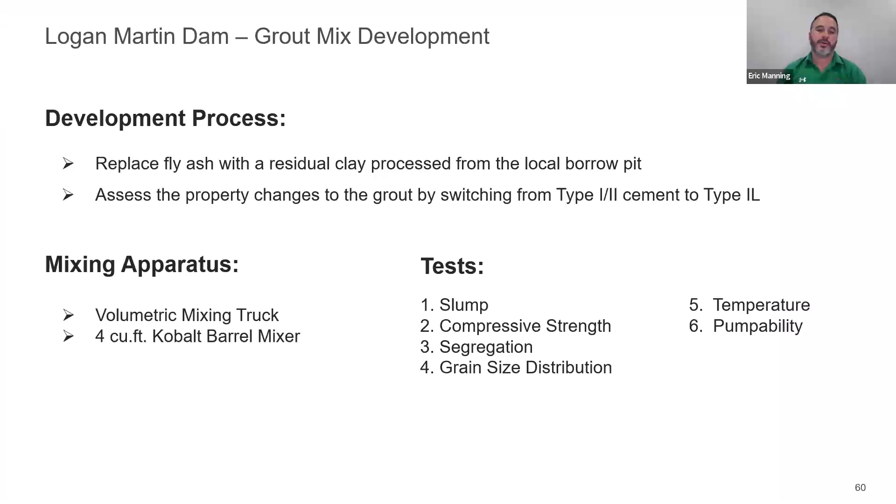As I mentioned, recently we started this grout mix development program, testing our conventional type 1-2 cement mix and comparing that to our type 1L. I also mentioned the purpose of this was to replace the fly ash and substitute it with the local residual clay that's processed from our local borrow pit.

I'll just highlight the high level results that we saw. We didn't really see any major changes, and I say major changes relative to the criteria we need for the grouting we're performing out there. We don't really need a lot of strength for the low mobility grout columns - our design strength is 1500 PSI, and we were able to achieve that while replacing all of the fly ash and cement, which equated to roughly 40% of the fly ash and cement content. So that means we replaced all the fly ash and took some of the cement content, substituting it with the local clay material. We were able to achieve 1500 PSI with this mix.

This mix 3, type 1L, is the current mix with the super plasticizer - that's the Sika 300 super plasticizer that we use with the clay mix. That's our current mix that we use for low mobility grout columns.

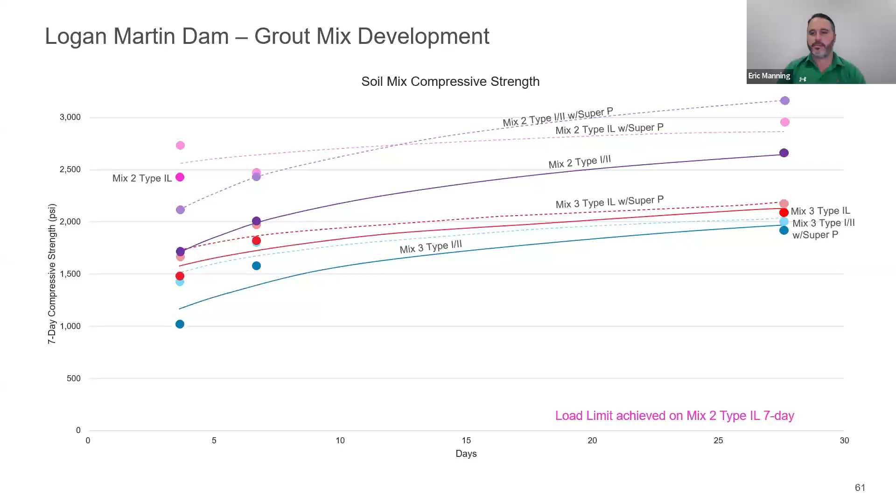Let's see. It's like it's not wanting to go. Let's see if I can get it.

One thing we noticed is that the type 1L does gain strength a little faster, but it tends to have slightly less strength than the type 1-2. Some of that may be attributed to the first batches that came out of the local cement plant - I think they had a little bit of quality control challenges early on in their type 1L deployment.

According to our admixture rep, they were experiencing slightly higher sodium carbonate levels in their type 1L cement, which acts as an accelerant. I think that attributed to the higher strength faster, but it also attributed to issues with the grout flashing on us, which is why we had to revert to super plasticizer to help control the set.

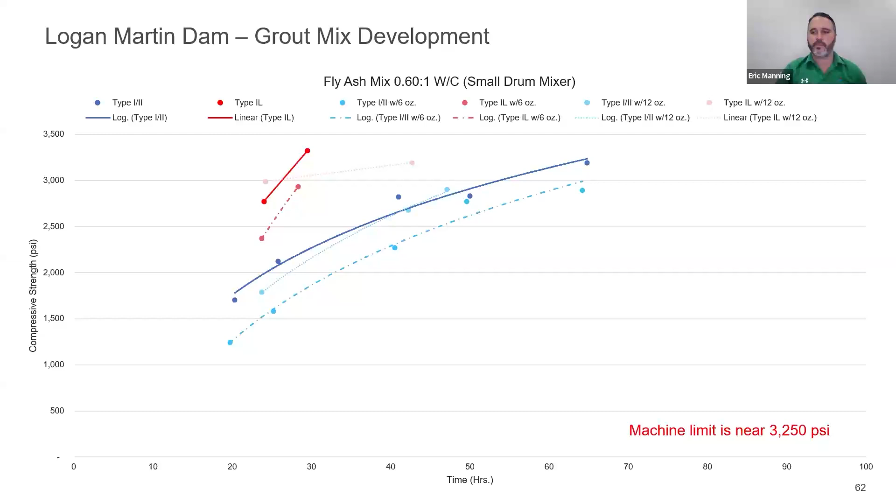As I'm approaching the end, I'll try to go through this last section briefly. Sorry, this is freezing up a bit because I have really slow internet here.

I want to touch on the research and development program we began back in 2016. We developed a test chamber for simulating karst geology, and in this test chamber we tested mix designs that we've used in the project throughout the years, as well as used it to help develop and optimize mix designs for future projects.

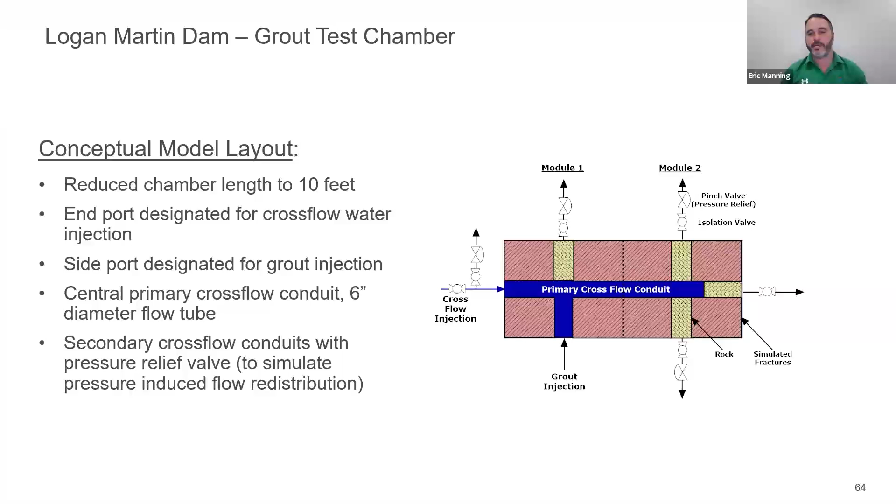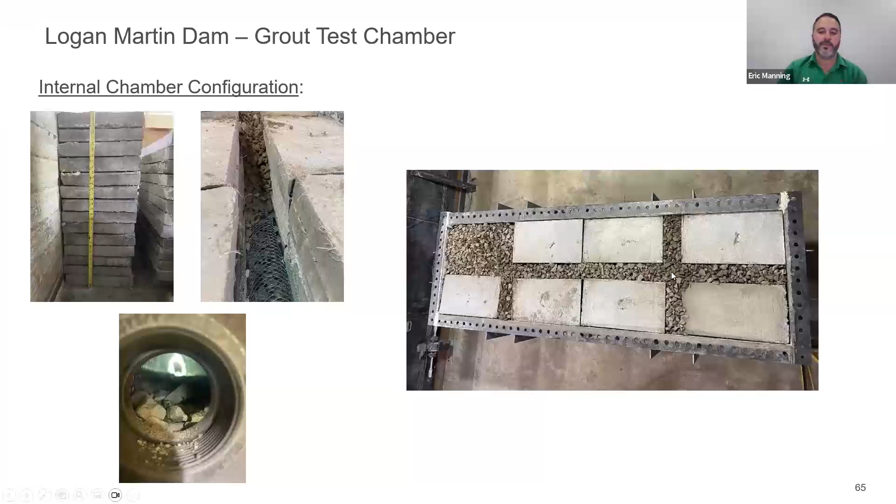Just a few years ago, we converted this test from what originated as a static test, where we had a test chamber filled with geomaterial to simulate karst, to now where we modified the box, reduced its size, and the setup now entails simulating a karstic tube that runs down the length of the test chamber. We introduce unrestricted flow from one end to the other, then grout through the side, intercepting the cross flow to determine which mixes are more effective at grouting off this cross flow condition that we sometimes encounter out at Logan Martin.

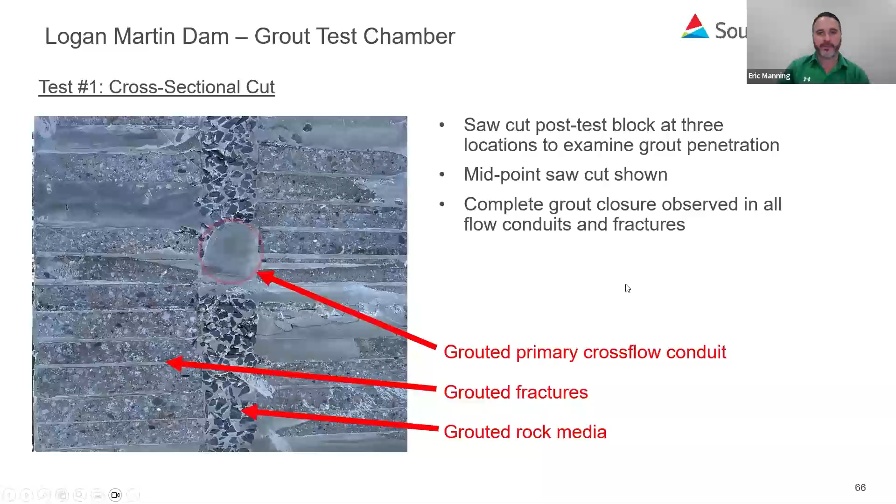And with that, that's all I have, which gives us roughly about 15 minutes for Q&A, which I think Kathleen is going to moderate.